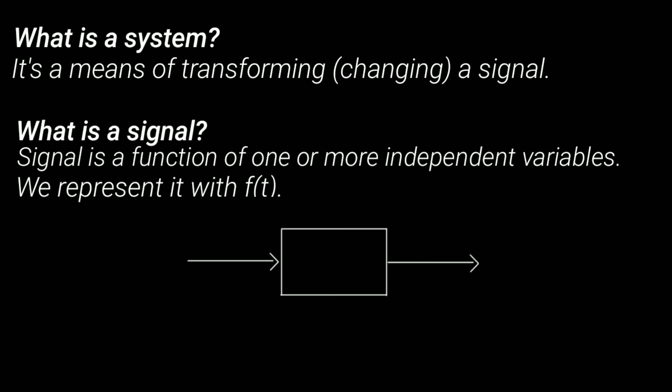This is the simplest block diagram of a system. Here x of t is input and y of t is output. Y of t is nothing but transformed x of t. That is what a system does.

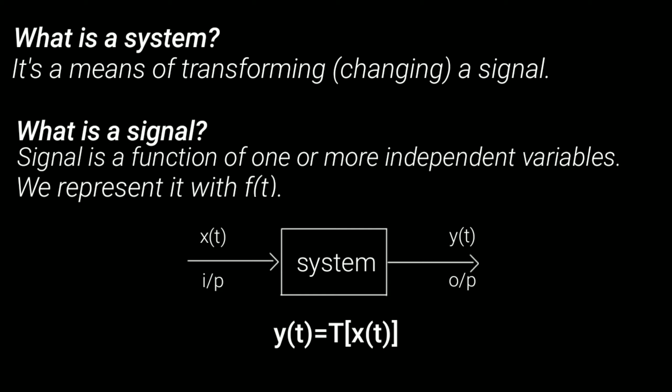Now that you know what a system and a signal is, it makes sense to know what a control system is. Control system is a system which produces desired output for a given input. Desired is the highlighted word here. That is, output of a system can be controlled by the user in a control system. Control system is that means by which any quantity of interest is maintained or altered according to a desired manner.

For a system to be a system, it has to have two or more number of signals. But for a system to be a control system, it needs to have two or more number of systems. I'm repeating it again: for a system to be a system, it has to have two or more number of signals. For a system to be a control system, it needs to have two or more number of systems.

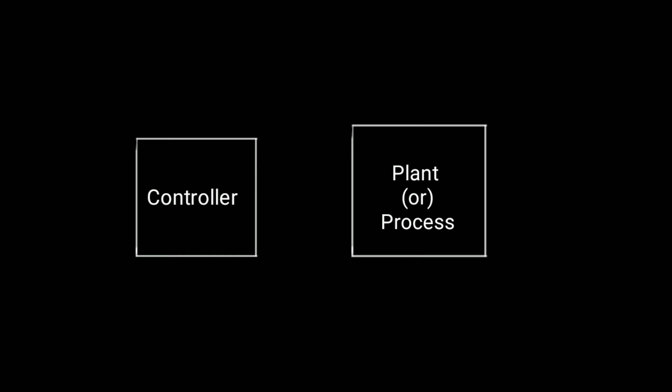Let's simply consider system 1 and system 2. One system needs to be controlled, another system is through which we control. Together, they are a control system. The system that needs to be controlled is the plant or process. The system through which we control is the controller. Thus, we can develop a basic block diagram of a control system from this idea.

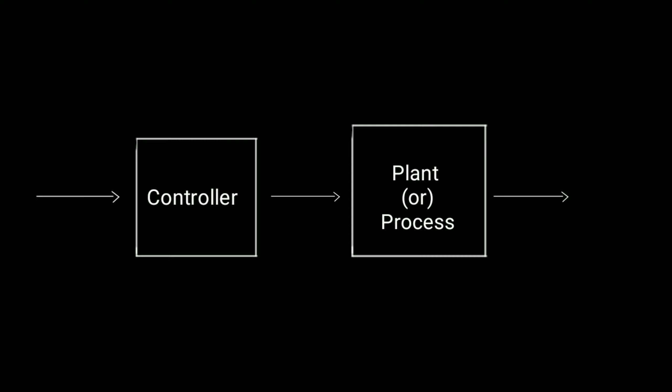This is the basic block diagram of a control system. Input to the controller is command, reference input, or desired output. Let's not confuse ourselves with how a desired output is on the input side of the controller. Let's understand it this way: desired output at the input is nothing but the output we want from the controller. In that way, input is given to the controller. Then accordingly, from the controller, actuating value is given to the plant or process, and then we get the controlled output.

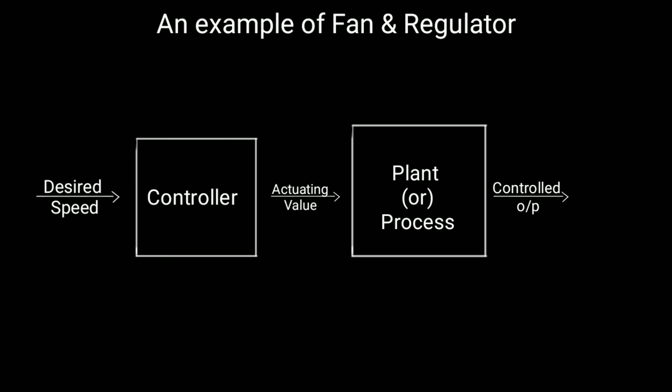To understand the block diagram properly, take an example of a fan and regulator. The speed at which we want the regulator adjusted accordingly is the reference input or desired output or command. Then from the regulator, current, that is signal according to the set desired output, flows. It's nothing but the actuating value. Then that current is given to the fan, that is the plant or process, and the speed of fan is according to it, that is, it is the controlled output.

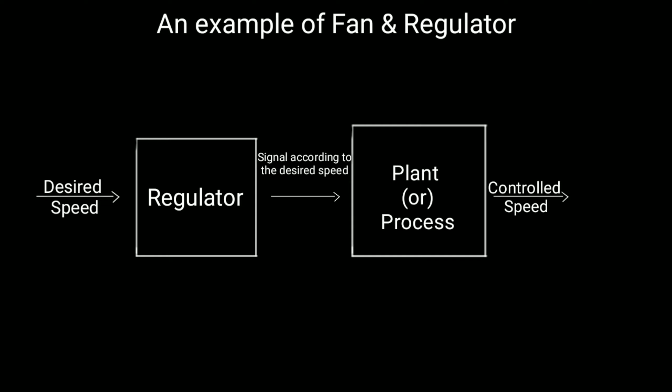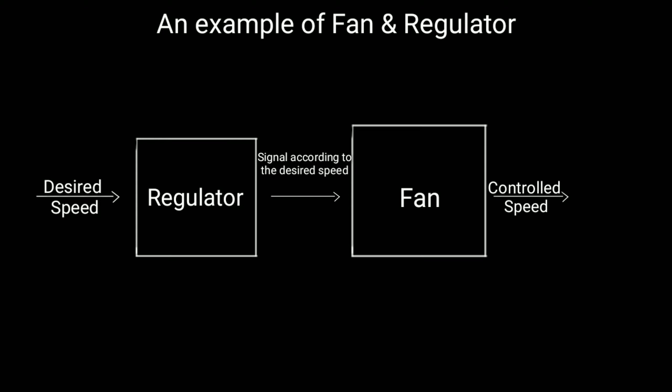Therefore, the speed that we want is nothing but the desired output, reference input, or command. What controller is, is the regulator here. Current is the actuating value, and the fan itself is the plant or process. And the speed of fan, which is desired by us at which it is to rotate, is nothing but the controlled output.

Now, this is all under ideal conditions. Ideal conditions, it is like a dreamy world in which we want to live. But practically, there are always some things that we don't really want. Okay, coming back onto the topic.

Practically, there will be disturbances on different parts of the system. Usually, disturbances on the plant or process will affect the most. Therefore, because of this, the output is not exactly the desired one; some errors can be present. To avoid this, either we can remove the disturbances or make changes in the actuating value according to disturbances, such that the output we get is nearest to the desired value.

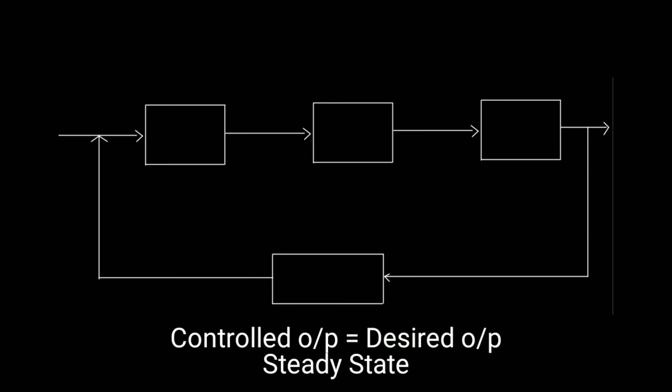The block diagram shown here is the block diagram of a practical control system. The objective of any control system is to ensure that the controlled output becomes the same as the command or desired output. This state of the system is known as steady state. But if any disturbances occur, then the control output differs from the set value. To restore the output to its original value, the control system is modified as shown here.

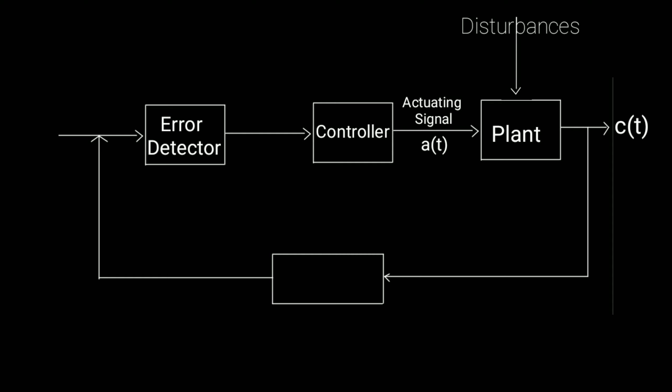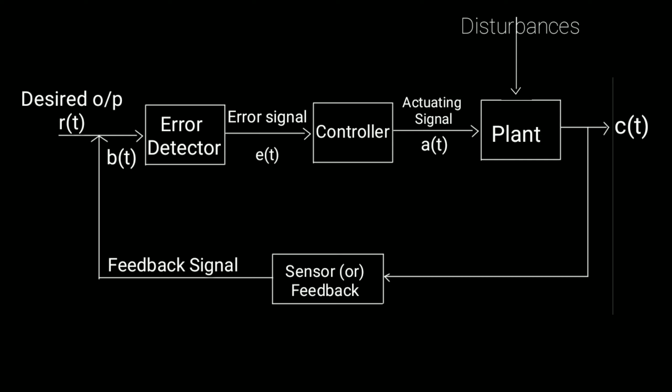Error detector with the help of a sensor produces an error signal, which is the difference between desired output and actual output, which is suppressed by the controller. Hence, the effect of disturbance is removed from the control system. It is used to identify the disturbances offered by the plant, not its own disturbances.

A control system can reach steady state with 100% output only at t equal to infinity, that is, never. Because the control system is designed such that the disturbance effect associated with the plant is eliminated, but disturbances associated with other parts may still be present.

Feedback in a control system is employed mainly to improve its accuracy, but it also affects other characteristics of the system like gain, bandwidth, speed, stability, sensitivity, etc. A feedback can be a positive feedback signal or negative feedback signal. As we know, negative feedback signal is nothing but an out-of-phase quantity, or it is just 180 degrees shifted. Negative feedback ensures better stability of the system, but negative feedback alone won't make the system completely stable.

So this system with feedback that we have just discussed is nothing but a closed loop control system or feedback control system. Now, the types of control system are: first, control system with feedback, or open loop without feedback. In the next video, we will be learning the types of control system and all the important points related to it. Thank you.